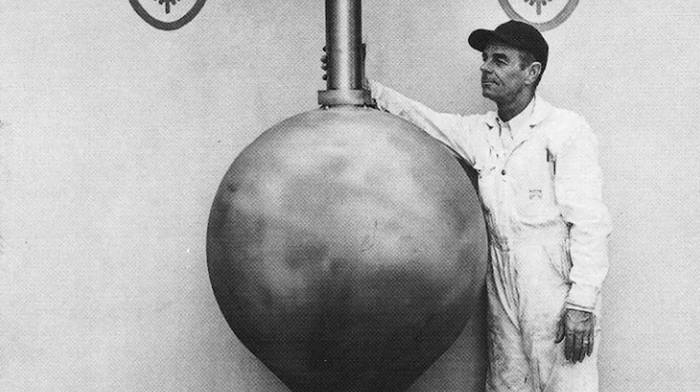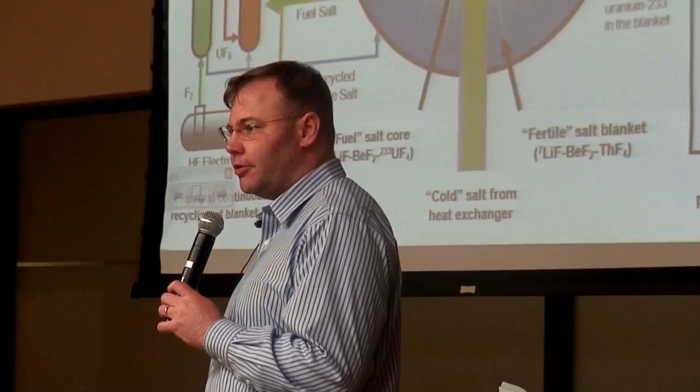You know, the Navy had reactors, and so the Air Force had to have reactors. Very, very radical nuclear reactors, totally different than the kind of stuff we have now, based on the idea that you could take salts and that they would be a really good medium in which to have a nuclear reaction. Well, we were young chemical engineers at the time, and God smiles on young chemical engineers. They do things that in later years would be regarded as crazy.

It wasn't that I'd suddenly become converted to a belief in nuclear airplanes. That the purpose was unattainable, if not foolish, was not so important. A high-temperature reactor could be useful for other purposes, even if it never propelled an airplane.

This is an old facility. Look down before you walk. That's our biggest hazard here right now.

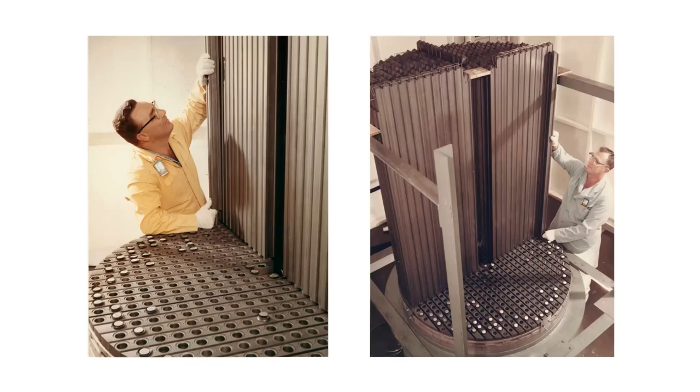Oh my goodness. Yes, yes. I've modeled this shape neutronically. It is like a lead pencil, isn't it? Yeah, it is. Basically, graphite.

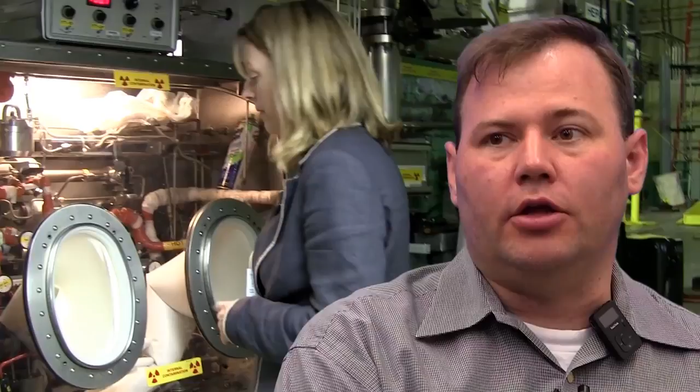We just returned from a trip to Oak Ridge National Laboratories, and one of the exciting things that the Baroness and I got to do was to tour the Molten-Salt Reactor Experiment, which was one of these type of reactors that was built in the 1960s. It was an experiment that demonstrated many of the key technologies, although there are some that still remain to be demonstrated.

How long have you been here? I've been here since 1992. There are very few people in mid-career in nuclear energy right now because there's a huge trough. We have a large number of students coming back into it.

Well, the context has changed completely, hasn't it? It has. Yeah, when we went into nuclear energy, they said, 'What are you, nuts? There's no future in that.' And it really didn't matter. We say it's the true believers.

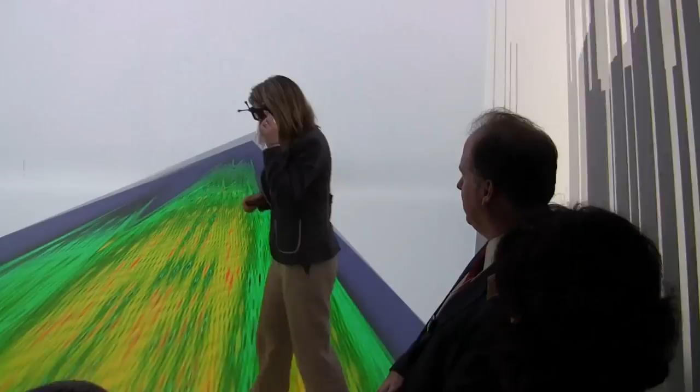So you could have a molten salt reactor that you could walk around on. Oh, this is so cool. You guys have got to try this. Oh, goodness, that makes you feel really weird. There's something in front of me here, it feels like.

I was in 7th grade. I read an Isaac Asimov story about the implications of what free energy would do. And I sort of knew I wanted something, I was going to be an engineer or scientist just from day one. And this sort of said, okay, what can you do to make a difference? And that was where I sort of said advanced nuclear power was something that could make a difference, and that low cost clean energy could make a huge difference to society.

If I'm going to have to get up every day for 50 or 60 years working on something, well, it ought to be something I believe in.

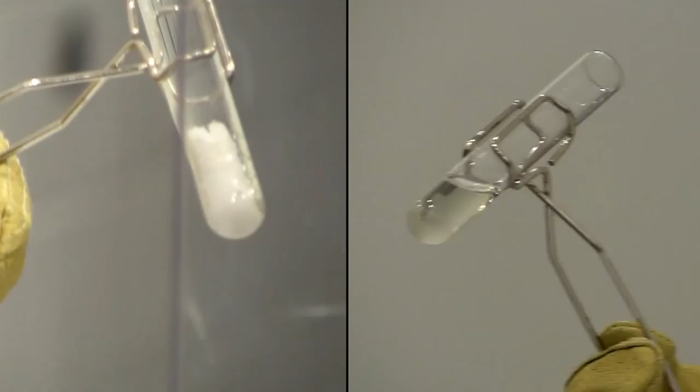Liquid salts are an outstanding heat transfer media, and it really doesn't matter what you're going to be transferring heat for, whether this be a solar power tower, whether this be a salt-cooled reactor or a molten-salt reactor. Viscosity on it is 30 times larger, but water's very low viscosity, so it's still a very low viscosity fluid. Some people might imagine this is quite a gloopy or slow-moving liquid, but it's actually quite fluid. You're right, it does go through a melt much like a glass as opposed to water, which doesn't quite do that. So we want to run it 100 C or so above this, so it flows nicely.

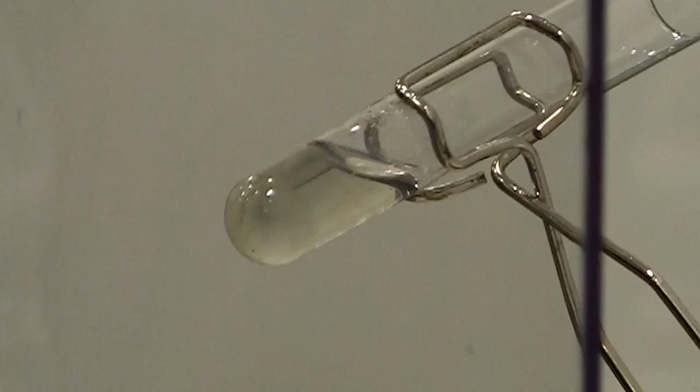If you go ahead and repeat doing things in here, you can see you start to etch the glass just a little bit. So what we have to do in a reactor is keep things very highly reducing. If you put extra beryllium in there, it's essentially giving you a preferred spot to rust. And so this is all about controlling the potential corrosion of the salts within any vessel that you put it in. Yep, the chromium in some of the alloys is more soluble at higher temperatures, and so at your heat exchanger, where it's at hot temperatures...

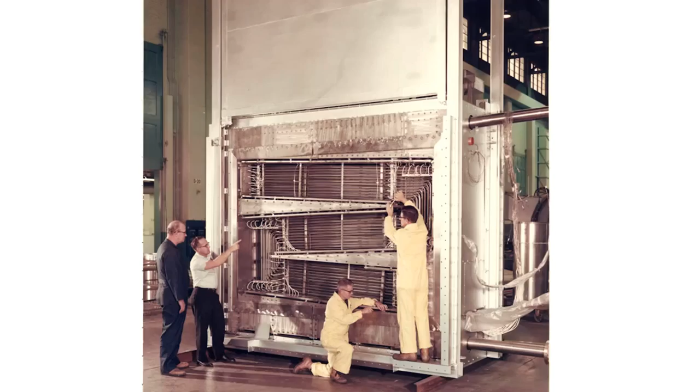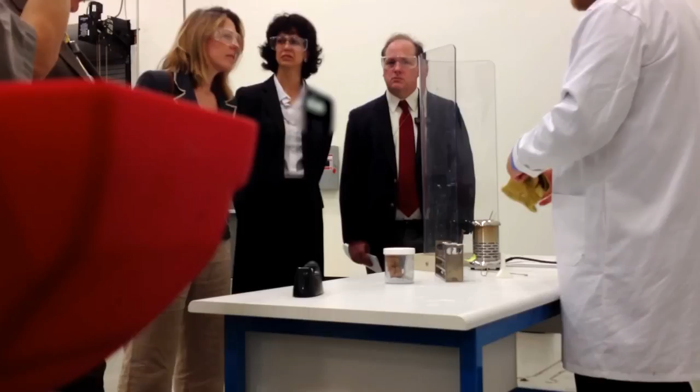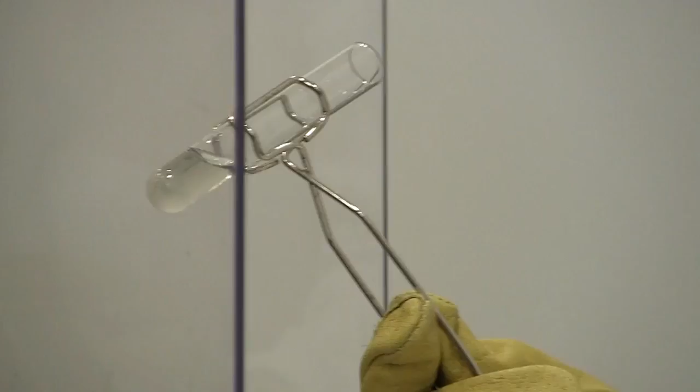The hazards on this are the same as hazards on a deep fat fryer, which is tripping and throwing hot oil, or hot salt in this case, on visitors would be considered a bad thing. But there's nothing else to this, it just makes a nice little clear liquid.

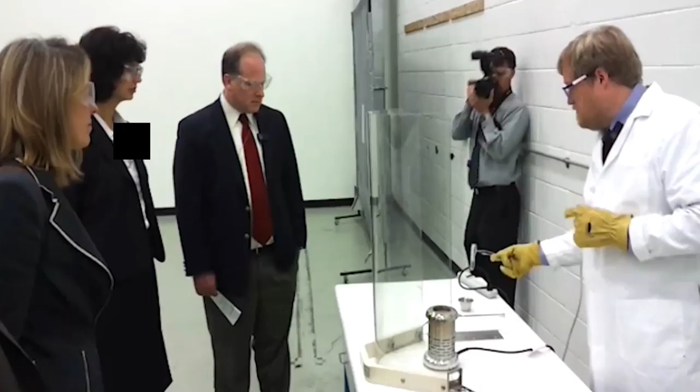I'll just pour this out into a little stainless steel crucible, and you could hear that little snap there - that was just a little bit of moisture at the bottom of the stainless steel. At 450 degrees this thing is a solid, so it doesn't take very long for it to form the solid again. Isn't that a nice feature? If you had a little crack and it was starting to weep, it forms a plug - self-plugging. That's a nice thing, not being under pressure.

On the other hand, if your design keeps the vessel hot, it'll stay liquid, but that's why you have a guard vessel. If, worst case, you have a massive vessel rupture, you still catch it.

The Navy program that led to the light water reactors we have now was well optimized to the needs of the Navy. It actually wasn't very well optimized to the needs of power production. The reason we have that as the base for our power reactor technology today is because the Navy was prepared to pay the first mover costs to make one work. And once you've done that, it's extraordinarily difficult to compete with it, because those first mover costs are very, very high and have no financial return associated with them.

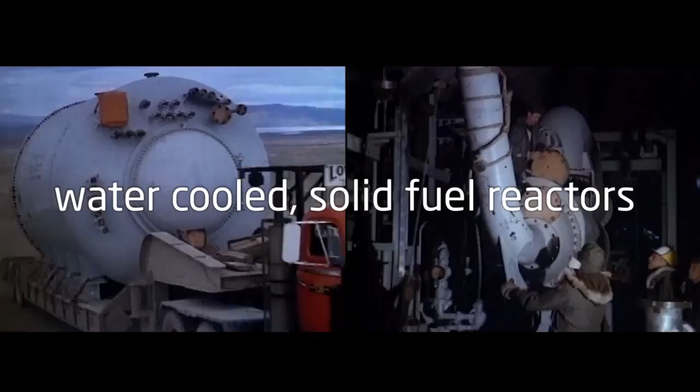The Navy has built their nuclear submarines, and the Army has taken the same technology as the Navy, the water-cooled reactor, and they're doing their thing. But the Air Force wants to build a nuclear-powered bomber.

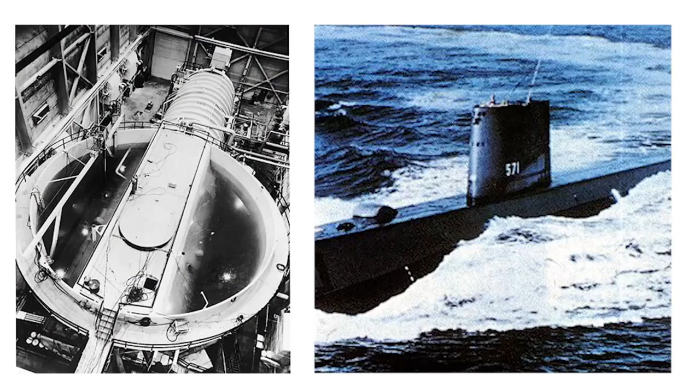Weinberg was a practical man, and he said a nuclear-powered bomber is like probably a really, really, really dumb idea. The dirty little secret was that most of the people involved in it knew from the get-go that it really wasn't practical. In contrast to a submarine, where you've got limited space but can shield it for the people on board, it's much harder on an airplane because of the weight. Most of us did not really think that the aircraft reactor really could work, but we did feel there was a very interesting technology there that someday could be applied. And I would maintain that Weinberg was absolutely right in his assessment of the situation back then.

He knew that to make the nuclear airplane work, they couldn't use water-cooled reactors, they couldn't use high-pressure reactors, they couldn't use complicated solid fuel reactors. They had to have something so slick, so safe, so simple, that operated at low pressure, high temperatures, with all the features you wanted in it. They didn't even know what it was.

I think someday this will be looked at as one of the great pivot points of history - that if this program, this nuclear airplane program, had not been established, the molten salt reactor would have never been invented, because it is simply too radical, too different, too completely out of the ball field of everything else for it to be arrived at through evolutionary development. It had to be forced into existence by requirements that were so difficult to achieve, and the nuclear airplane was that.

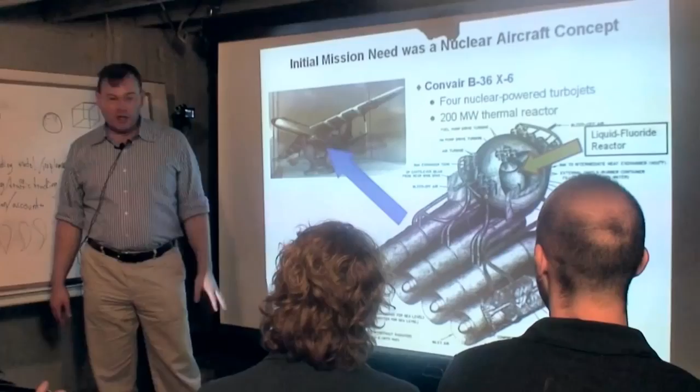So they began working on this high temperature reactor. And remember, this was invented before we had ICBMs or anything like this - this was a doomsday weapon. I mean, if you're flying this thing to Russia, it's the end of the world.

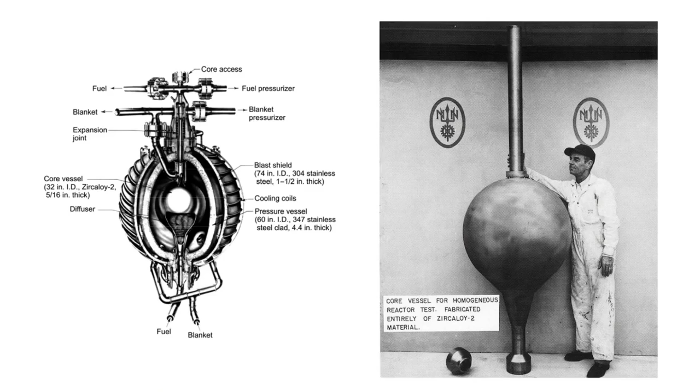I suppose you'd have to say it was a miracle that the homogeneous reactors operated at all, rather than that they operated well. Chemical stability of the system was not really sufficient - it was chemically unstable. The second reactor actually operated very well. That was the Molten-Salt Reactor Experiment.

There it is. This is the place.

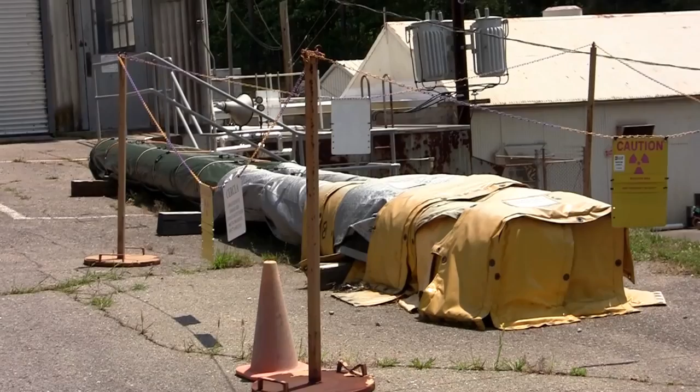These things right over here are the spent probes. Those things would extend to like 60 feet in length. They went down the tank, did the melting, did this bubbling and stirring and everything. A lot of them started above the high bay - when you say high bay, it's taller and we can put cranes in because we can lift things up. You had to go down an additional 25 feet to get to the top of the tanks.

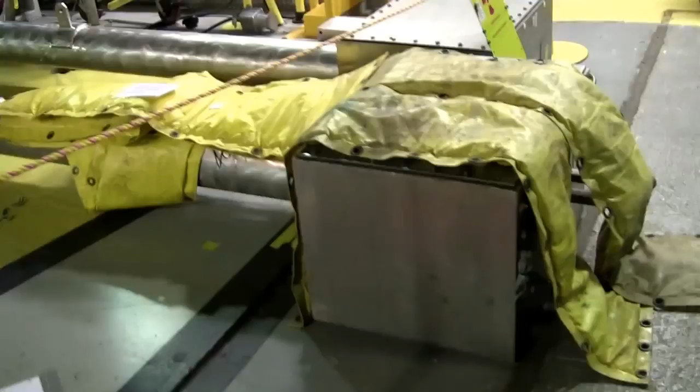Then you had to go inside the tanks, so those things would extend. You got a pipe within a pipe. The box is the top part of the probe. We had the controls, we could tell exactly how far down the probe was moving and the weight of it. And the probe had heaters on the end of it, then it would melt a pool in that salt and sink down in it.

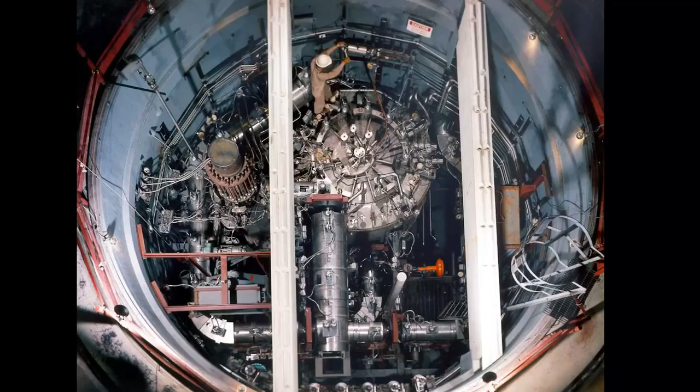So all those long-handled tools they had for operations, it was almost heroic actions, you'd say, when they were trying to do things. And you've got this length of distance, and we'd certainly try to design things today that could be robotically handled. It just would not be designed the same way as it was at that point.

One of the things I've learned from talking to some of the old timers at Oak Ridge - these guys are in their 80s now, if they're even alive - people didn't disbelieve that we could build the machine, they didn't believe that we could maintain it.

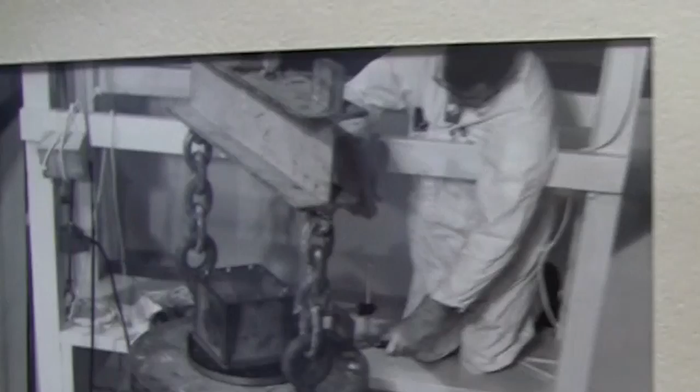Operation of the MSRE was not too difficult, and the people that I had working for me, they all had pound dogs under the porch, old cars out in the yard that didn't run very well. If anything came up with the molten-salt reactor, they'd say, hey, we'll fix that. How you gonna do it? I don't know, but we'll fix it.

And they did. One time, the sample capsule is down in the pump. Flexible steel cable got tangled up. It got bad news - here's the end of that cable cut off. So I said, what are we going to do? And there's the good old boys for you - they said, isn't there such a thing as fiber optics? There's the capsule, and they fished that capsule out. We were back in business.

And they had a lot of long-handled tools, remote cameras. It was challenging, but he felt like, despite the challenge of operating in high radiation fields, that they were able to operate and maintain that machine over the course of its lifetime.

We worked for several years on an experiment that proved that you can handle this molten salt reliably, and when things go wrong, we were able to fix them. The advantages outweigh the difficulties, and the concept is ultimately going to be a practical application.

We still have a few folks who are even operators here who are around. Sid Ball's office is just literally 3 over from me. He was at the controls when it reached its highest power there. He told me that was an accident. It sure was. Yeah, there's another way to tell that story too.

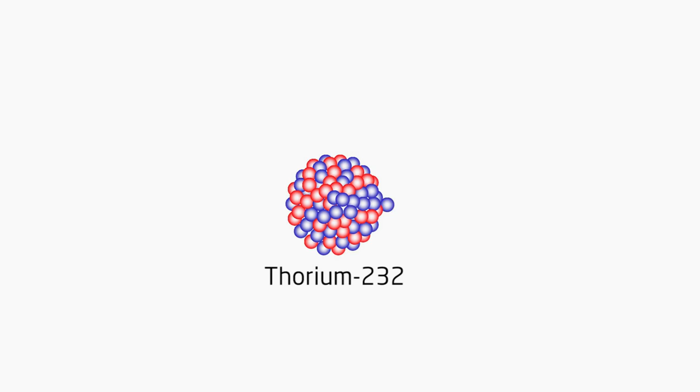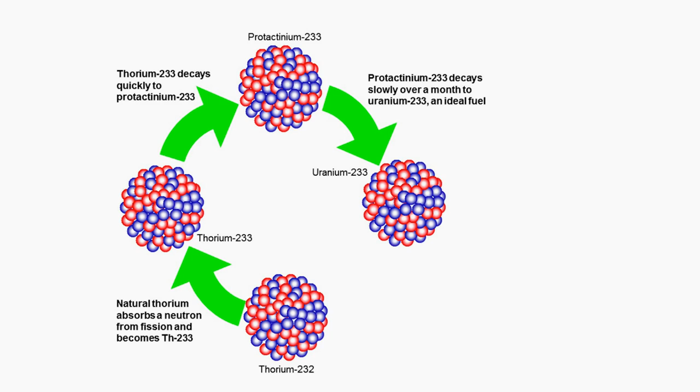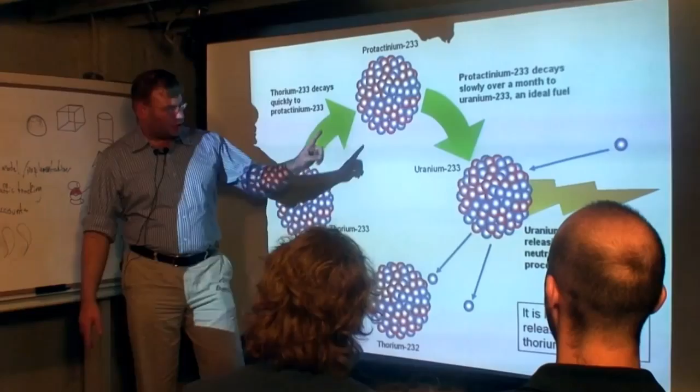The basic idea is thorium all by itself is not going to release nuclear energy. But if you hit thorium with a neutron, it will absorb the neutron and turn from thorium-232 into thorium-233. It's going to decay into protactinium-233, and then it will decay over about a month to uranium-233. Uranium-233, if you hit it with a neutron, it will fission. In addition to releasing all that energy, it will release 2 or 3 additional neutrons. So you need one of those neutrons to go find another thorium, and you need another one to find another uranium-233 to continue the reaction.

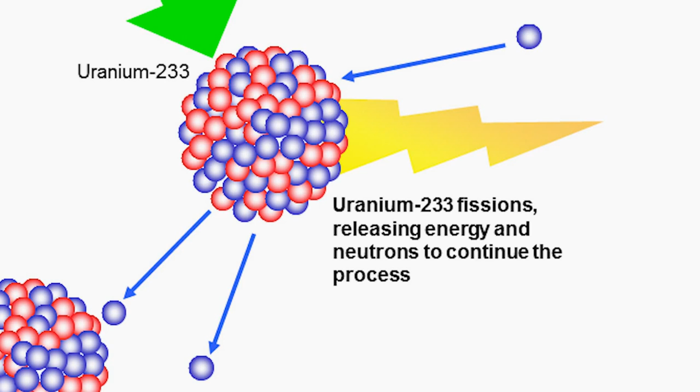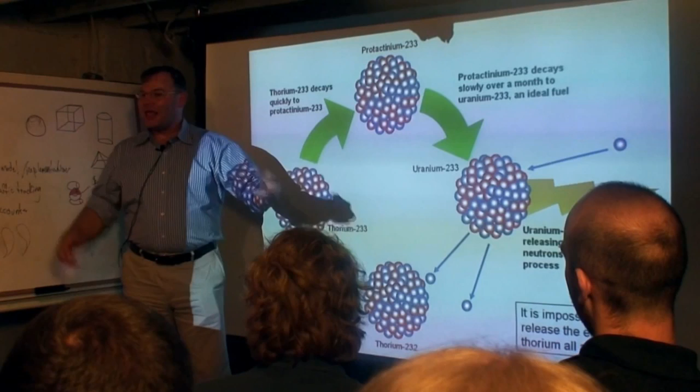You're fissioning uranium-233, but you're making a new one. You can almost think about it as a pseudo-catalyst. If you had some uranium-233, you could catalyze the burning of thorium indefinitely. Through this process, you can essentially implement that very simple thorium cycle, and this is what Weinberg and his team were working on in the 1960s.

The molten-salt reactor experiment was the core. After they completed the molten-salt reactor experiment, they went to the Atomic Energy Commission and said, hey, can we have some more money? We'd like to go now and build the real thing. We'd like to build the blanket, and hook a power conversion system on and make electricity.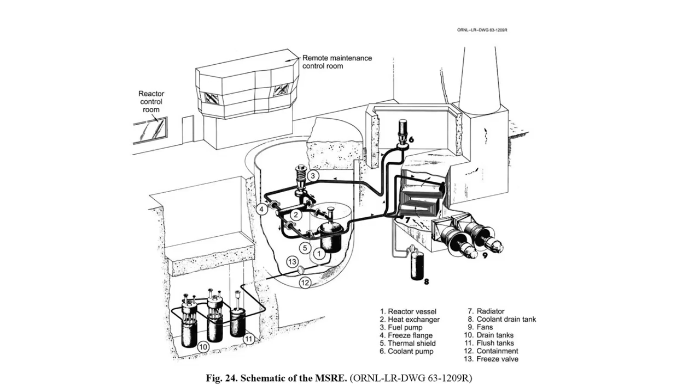They felt like they'd shot the moon. Well, the Atomic Energy Commission, unfortunately, did not share their zeal to continue with the technology. Milton Shaw, who was the head of reactor development in Washington, called up Alvin Weinberg and said, stop that MSRE reactor experiment, fire everybody, tell them to clear out their desk and go home, and send me the money for fast breeders. Milton Shaw was sold on the sodium-cooled fast breeder reactors, and I am not familiar with why that was.

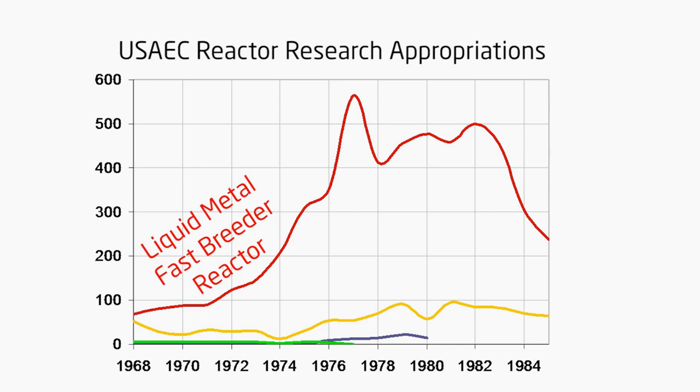The red line shows the expenditures on the liquid metal fast breeder reactor, and this graph only begins in 1968. At that point, the United States had already built several liquid metal fast breeder reactors. It's very hard to see the green line for the molten salt reactor technology - it's extremely low. And then ultimately it was canceled.

We were competing with the fast breeder people at Argonne mainly. They just had more political sway than the molten-salt reactor.

Do you see a prevailing opinion here about molten-salt reactors? We haven't been funded to look at molten-salt reactors. There's no opinions about basic - the opinion is simple: build IFR. That's it, okay, that's the opinion.

The problem with the MSRs is that they've never done it. They had one at Oak Ridge for a little while. Yeah, they went through and did a couple of little tests. We realized that we were minor league money-wise compared to the other programs.

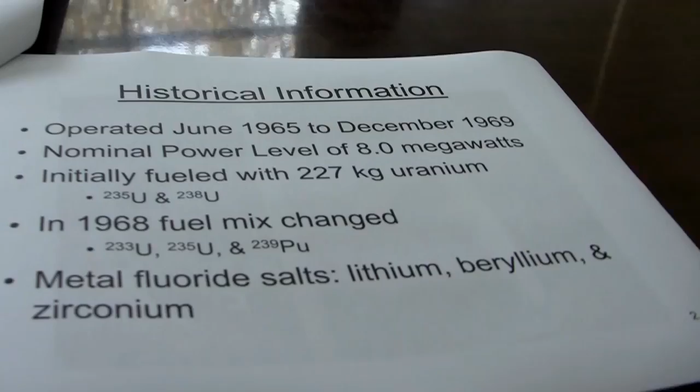U-233 was tested here, and there was a little bit of U-235 in it, and they added some plutonium-239 in that fuel mix. Do you know how much plutonium was added? Oh, about 600-700 grams. They thought the U-233 was the utopia of uranium fuel.

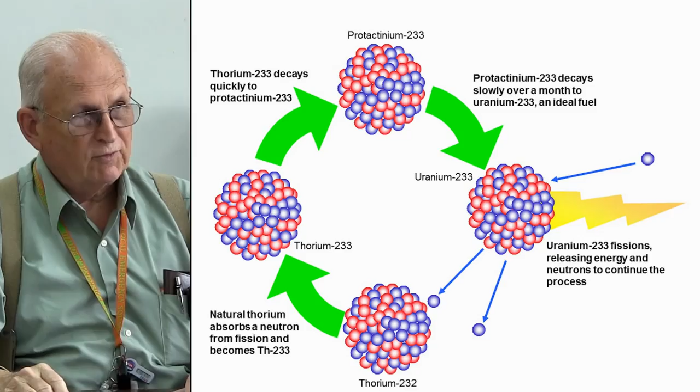Do you feel like the program had a sound technical basis, or do you feel like technical problems were the basis for cancellation? Some of the technical reasoning I heard for the cancellation was that there was a corrosion problem. Tritium was raised as another issue. We made no effort on MSRE to do anything with tritium, and there was a perception that managing tritium was going to be a very difficult, if not insurmountable, issue.

This is the WASH 1222 report from the AEC. Did the people on the program feel like tritium was an insurmountable problem? We recognized that tritium would have to be captured and sequestered for the system to be viable, but most people thought that's something we should be able to do.

Did the people on the program, particularly the chemists or material scientists, feel that corrosion was an insurmountable problem? No, and in some of the subsequent work, after that initial shutdown, they did some experimental work that seemed to bode very favorably for an ability to solve that issue. As well as the tritium issue, because we did do some tritium experiments in that 1974 to 76 period, and those are documented.

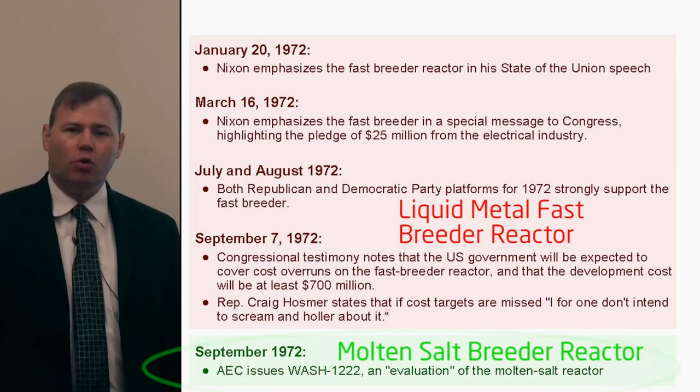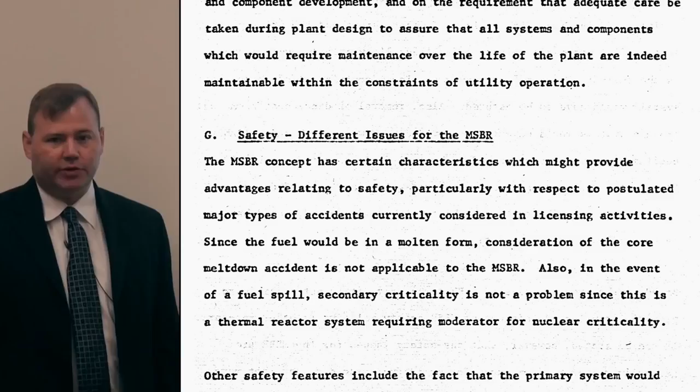In that same month, the Atomic Energy Commission issued WASH 1222, an evaluation of Weinberg's molten-salt reactor. It was highly critical of several technological issues encountered during the development of that idea. More importantly, it almost completely ignored the safety and economic improvements possible through the use of molten salt reactor technology. This was the main focus of Oak Ridge for decades, and it was very abruptly cut off, a very bitter pill to swallow for them. So a lot of these great minds thought their life's work had kind of gone to waste.

The original shutdown came early in 1972 with a letter from Mr. Shaw that says, 'Thou shalt stop right now.' One anecdote I heard: he said, put your hand on your desk, take everything that has to do with molten salt, sweep it off, and you're finished. I saved all my documents. I did too.

So you had this geographically isolated place with a huge body of concentrated molten salt knowledge that never got out. We had a corpus of people in Oak Ridge who knew how to do this in the mid-1970s. They're literally dead and gone now. People that worked on the molten salt reactor would come back and then get shut back down again. A lot of people got burned out from that pattern.

I've met a handful of them. They're in their 80s. They're not going to do this anymore. What's happened to Paul Haubenreich and Beecher Briggs and those guys? Have you kept track of them? Well, Beecher's been dead for a long time. How about Paul? I have not had any contact with him, so I don't know. Quite a few of them are dead now. Well, that's true too, yeah.

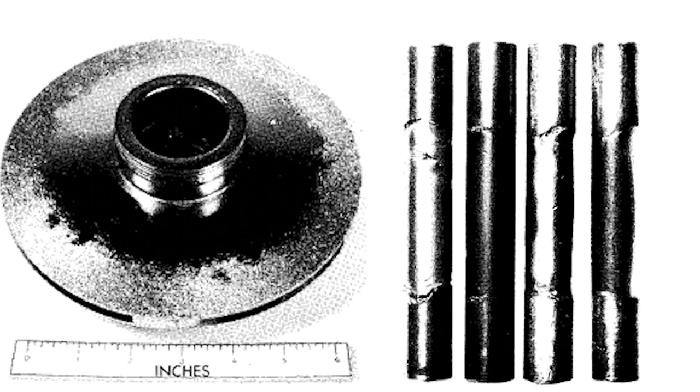And he said it probably set us back a decade on some of our ability to roll out quick changes to our recipes. Oak Ridge made a lot of these salt loops - basically little circular loops of plumbing pipe where they would circulate hot molten salt to see if it corroded the piping. They would run these things for 20 and more thousand hours of operation. They were valuable artifacts of the molten salt age. Well, Oak Ridge was throwing them away, and Uri Gat was like, no, we need these if and when we restart molten salt.

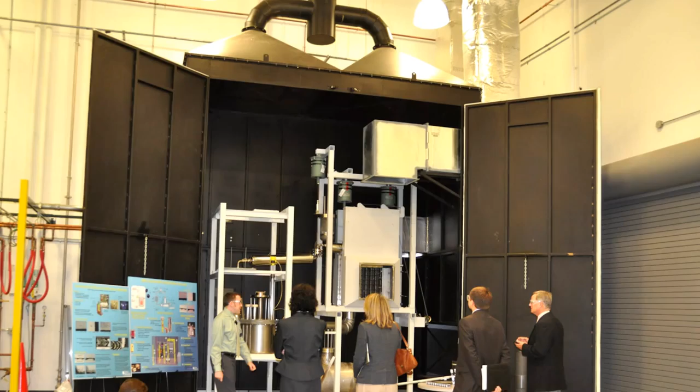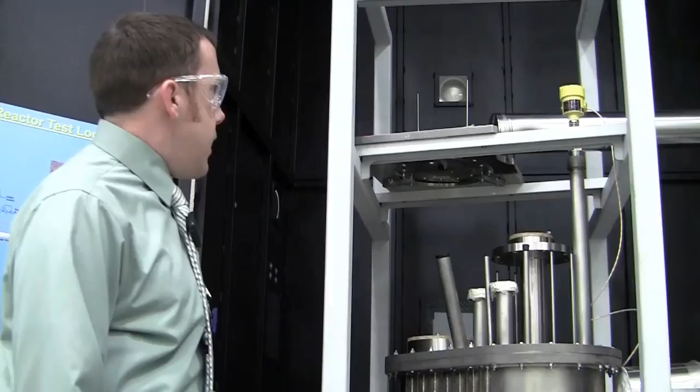We are trying to demonstrate some of the core technologies you need to make liquid salts a standard heat transfer material. The idea of this loop is to retain our expertise in using high temperature salts, to provide a platform for us to test different components and different reactor concepts. Above about 600 C, it becomes technologically very difficult to transfer heat effectively. The loop is designed to run at 700 Celsius, that's about 1300 degrees Fahrenheit. The whole loop is made out of Inconel 600. Ideally for salts, you'd use an alloy like Hastelloy-N.

Right now you can't really get the right components, the right shapes using Hastelloy-N, so we use Inconel 600. It's maybe not the best option, but it's the economical and available option.

This one does flow, so as the salt flows through it, it sends a sound wave through, and that measures the Doppler shift. So these are fluidic diodes.

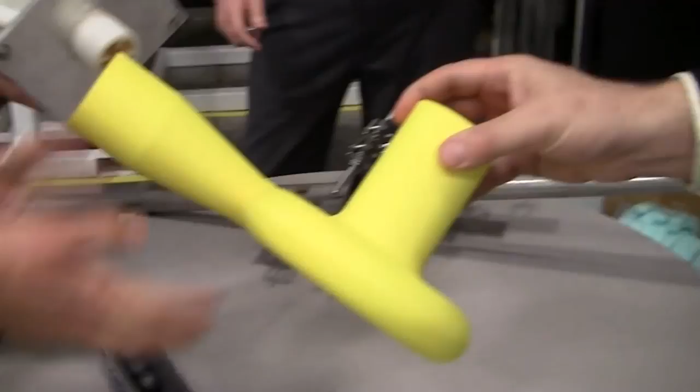It's a way to control liquid flow without using a valve. In normal operation, it comes in this side and out this side, and that creates a lot of resistance—it spins around and comes out. During an accident, the flow reverses and goes this way, and there's not a lot of resistance going from here, just flowing out, because it doesn't spin around.

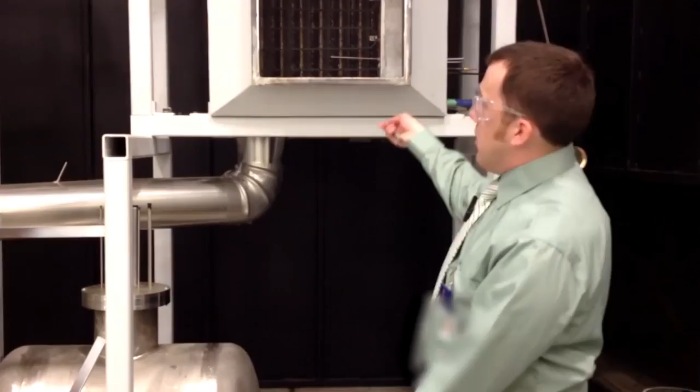Then there's a heat exchanger, that's another part of the test. Is all the heat localized on the pipes, or do you heat the whole box? Yeah, all the heating is in the pipes, either in the pipes or on the outside of the pipes. It's trace heated—you can see coils of heating tape. All the pipes will be insulated with about 4 inches of insulation.

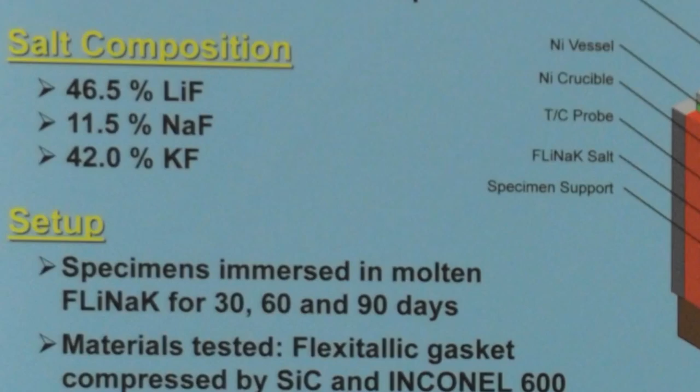There will be a crucible here. That's where we'll initially load the salt, pass hydrogen fluoride and hydrogen through it, and that will clean out the oxides and different contaminants inside the salt. Once the salt's clean, we'll pump it into the storage tank. The salt is allowed to freeze inside of it. That's an issue with salts—you can't have it just freezing inside of pipes, it expands and breaks.

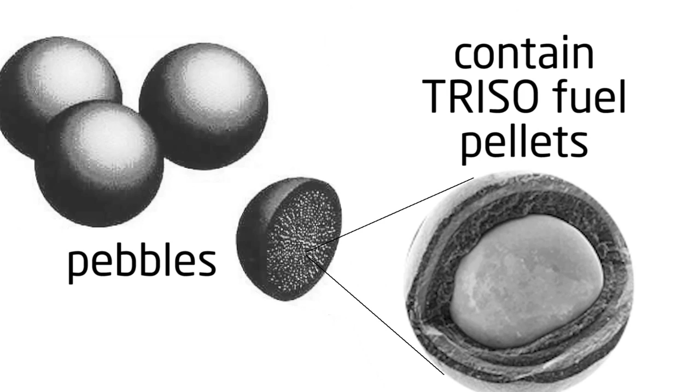The idea is we're testing a reactor concept where the fuel would be inside these pebbles. We'll fill it up about this much, 600 spheres will be inside of it, and that's where the fission and the heat are created, with flowing flibe over it.

Can I ask what the theory was around using a solid fuel pebble in the flibe rather than dissolving the actinide into the salts? Currently in this country, we're not really looking at the molten salt fueled systems.

Using a molten salt as a so-called working fluid, it does the job of transferring heat from one place to another. Molten salts have what's called a heat capacity—the ability to hold onto heat. They're great at it. In the example of your car, you want to move heat away from your engine as efficiently as possible and then just disperse that heat.

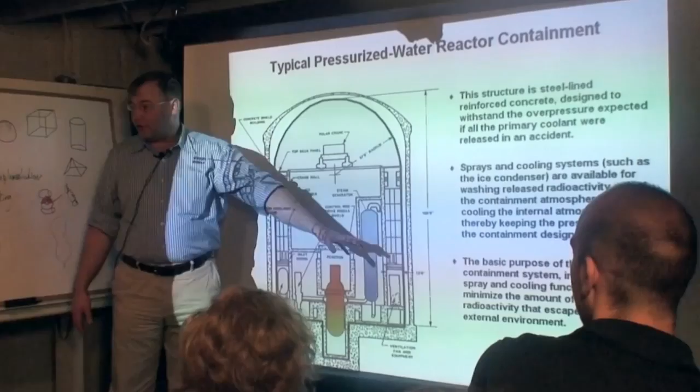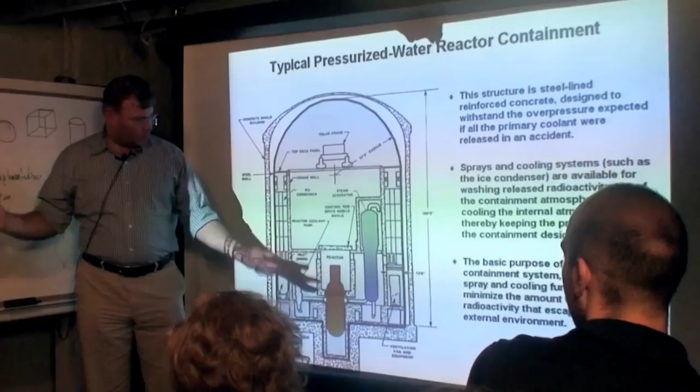The boiling point of water is only 100 Celsius, 212 Fahrenheit. Don't ever open your radiator—because it's under enormous pressure. This building is the size it is, and the way it is, precisely to accommodate this event. They've designed this reactor so if this happens, all the steam is captured in this building and doesn't get out. It's much, much bigger than the reactor, and that's all driven by that 1,000 to 1 difference in density between steam and liquid water.

The boiling point of a molten salt, however, could be 1,000 Fahrenheit, could be 1,500 Fahrenheit, depending on the type of molten salt. They do it at 1 atmosphere of pressure.

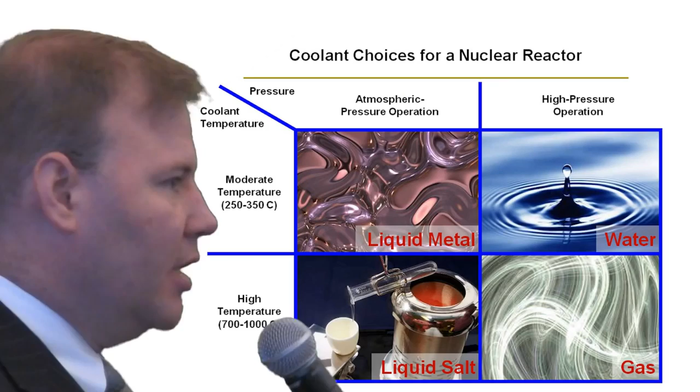Visiting the potential coolants, water is the one most commonly used. It operates at relatively low temperatures and very high pressures—that's exactly what we don't want. We want to operate at low pressures and high temperatures in order to achieve high thermal efficiency. Gas can operate at high temperatures, but it has to go to high pressure. Only the salts appear to offer the potential to go to high temperatures at low pressures, and that's a unique combination.

Using a molten salt as a working fluid to move heat around is excellent, because in that case you want as much of that heat as possible. Now, fluoride salts can also contain nuclear fuels like thorium and uranium, and that eliminates a major cost of what we do today in nuclear, which is to fabricate nuclear fuels.

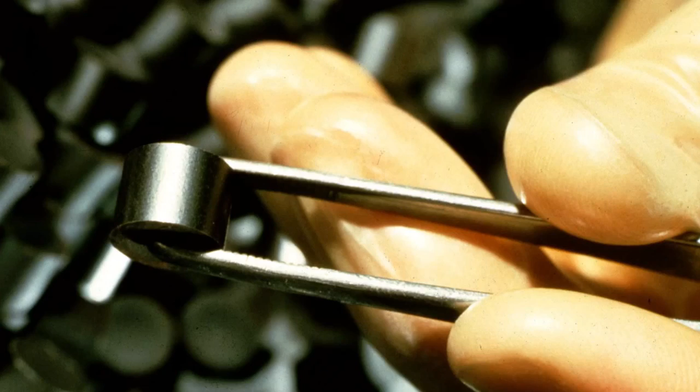Let me talk about today's nuclear fuel. They take these fuel pellets and slide them down zirconium tubes, segregating the pellets along the length of the fuel assembly according to enrichment. They'll put the most enriched ones in the middle, then decrease the enrichment along the length of the fuel assemblies. It's a ceramic.

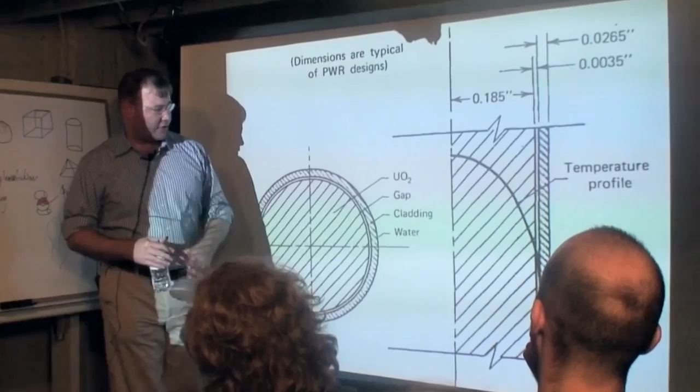It's a lot like the stuff your coffee cups or cooking ware is made out of. Great at going to high temperature, but not thermally conductive, so it gets very hot along the center line of the fuel. This stuff has about the cross-section of a pencil, but between the center and edge there can be like 1,000 degrees of temperature difference. That puts enormous thermal stress on the material itself.

You can't even come close to 100% burn, not even approaching it. If it gets too damaged, it's going to breach the cladding and let some of its fission products out. So you get very, very poor fuel utilization.

If you remember when you went camping and built a fire, it burns the hottest in the middle, and the stuff on the edge isn't getting burned very well. They'll load in about a third new fresh fuel, and then reshuffle the fuel that's already in there, moving it from the periphery into the center.

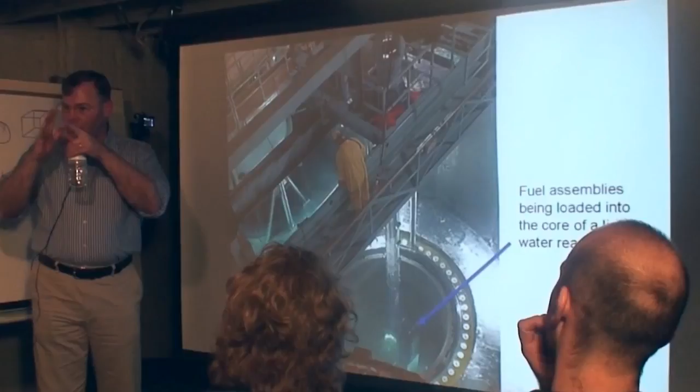All their money now is coming off fuel supply contracts. That's how GE and Westinghouse make money on nuclear power today. They don't build reactors, they sell fuel. Then someone comes along and says, hey, guess what? I got a reactor. It's got no fuel fabrication to it.

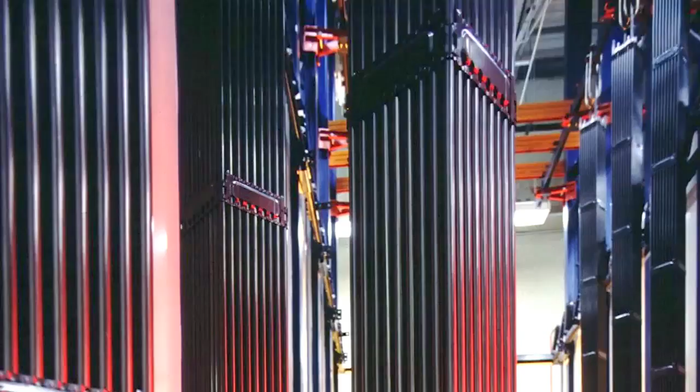Making a fluoride salt, by and large, is trivial. Making a carefully enriched solid oxide is not. So you could get an aqueous fuel. In this system, you wouldn't put fuel in it. There must be some advantages to doing the solid fuel.

If you want to use the salt as a coolant, it's much, much easier to do something that's non-radioactive on this. That's why we have the walk before you fly approach—the U.S. is electing to go after a salt-cooled reactor at first.

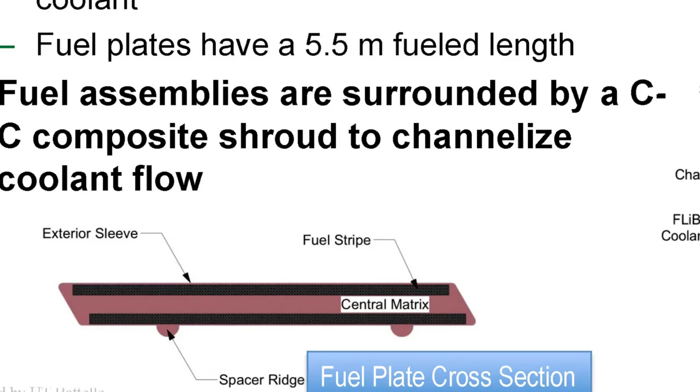Our method of rejecting heat is into the coolant. What we have are planks, about 25 millimeters thick. You can put whatever kind of test you can imagine in this area—we could put a solid plated fuel in. That test section can be replaced and others can be put in.

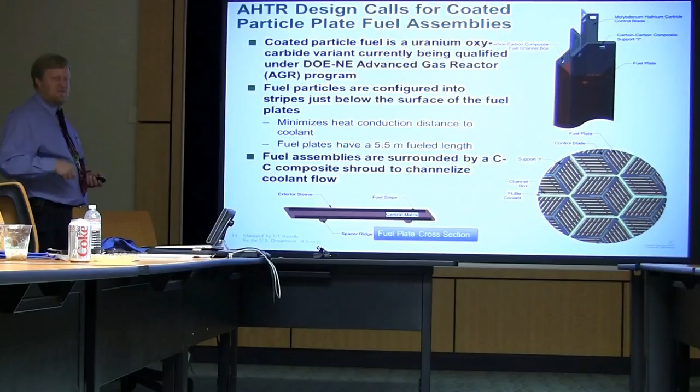Looking down from the top, there are 18 fuel assemblies arranged in a hexagonal grid. In a solid system, you can't get into the bulk of the solid fuel. In a liquid system, you effectively have infinite surface area.

It is not to say that the U.S. doesn't recognize that molten salt reactors have some very interesting, advantageous capabilities, but they are a more technically challenging thing to do. What is easier—running a liquid past a solid to transfer heat, or having the fuel itself be a liquid?

So I would argue that actually combining the two is easier. Sure, it's more chemistry, but so what? I'm a chemist. There are lots and lots of chemists on the planet, and a lot of them are a hell of a lot smarter than I am. So, go solve the problem.

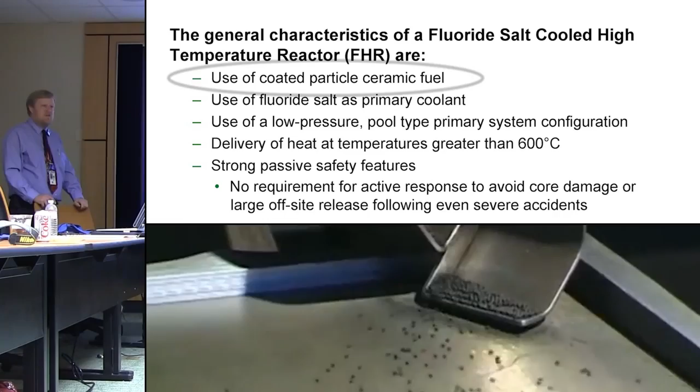It uses a fluoride salt as a primary coolant and coated particle ceramic fuel—that's the TRISO fuel. This is the TRISO. Essentially, these are small kernels, smaller than a millimeter.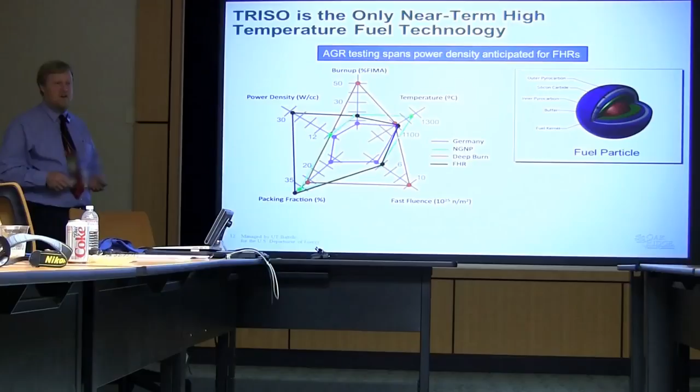We've got the fuel in the middle, and you've got a multi-layer structure—the important thing is the silicon carbide in here, which is actually a gas-tight containment. Even though we're using silicon carbide as part of the design, that's part of the test. We're going to find out how that performs in a salt environment now.

We'll be doing natural circulation, safety testing, corrosion specimens in here, and a pumped loop. Figure the next decade we will continue to use this as a base for our system.

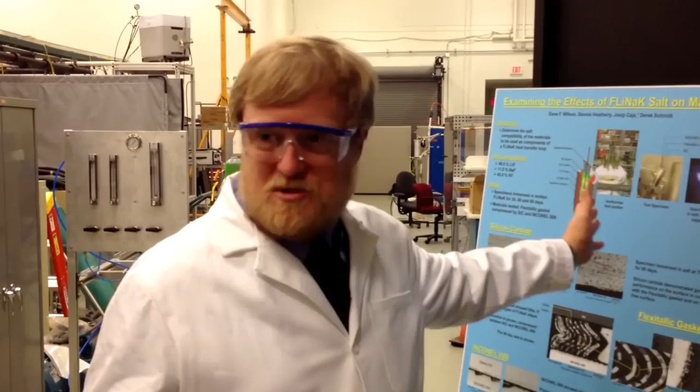And you just happen to hit the timing such that the induction power supply is out being serviced, the pump is out being serviced here. We're expecting by the end of September to have the loop pretty well ready to heat up.

They're not doing neutronic stand-ins the way China is. So what's the freaking holdup? They got the last guy in the world who knows how to make these different kinds of salts.

We're not asking for our national lab to do miracles. We're asking them to basically replicate something they did in 1952, probably. Things went very fast in the 40s and 50s, not only because of the regulatory environment, but also because they were not developing commercial nuclear power.

They're developing it—just get a reactor up, show that it works, do experiments. Nuclear technology is well beyond that now. It's commercial production technology, so you have to do things differently than we did back then. If you wanted to just do an experiment, yes, we could compress the scale and have something running at very short periods of time, but that's not what we're looking for now. We're looking to be a preferred source of energy for the nation, and that takes more time.

Back when they were developing the molten salt reactor, they had numerous loops that were not fueled—these range from natural circulation test loops, to material testing, to pump systems like this. Most of the technologies for a molten salt reactor, as far as thermohydraulics, are identical, so they're all very relevant.

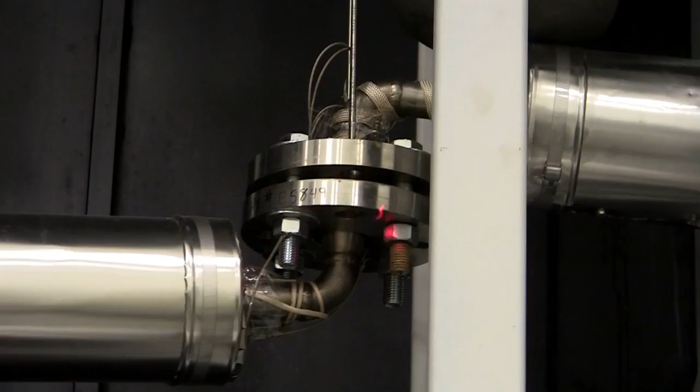There are a number of technologies that have never been done before in salt—that rotating flange up there with gasketed seals, the fact that we've got ceramic and metal pieces in a single loop. Tons of stuff you're doing with FHR is in common with what we're doing.

I can certainly see reasons for looking at thorium reactors as a follow-on, and the true molten salt reactor. You have your conventional solid fuel with a liquid coolant—a fixed fuel form with liquid flowing by it. Your pebble bed is a bit of a transition, in that the pebbles can percolate up through, so you get some movement of the fuel. Then your next step is a slurry, where you've got smaller particulate moving with the flow. And the final step is actually just the fuel in solution. You could almost imagine a continuum, with the pebbles just getting smaller until finally they're in solution. So each of these are steps towards a full solution.

Different reactor concepts—we're actually debating this internally within the nuclear lab system. Do we want to build a prototype reactor that demonstrates some game-changing technology for nuclear? Yes, you do. But it's going to be a major national commitment when you're talking those types of numbers, and there's nowhere near that level of consensus that this is the right path forward. Without building that consensus, we're going to stay an interesting technology option forever. We will never go beyond that.

We're funded through literally thousands of projects that come down from DOE and other government agencies where they say, we need you to go do this, we need you to go do that. There's no line in the federal budget that says Oak Ridge National Lab, $1.65 billion, go do good things. So we need something now to add to our grid with clean nuclear power, to get us to these advanced designs. And that relies heavily on the established light water reactor technology.

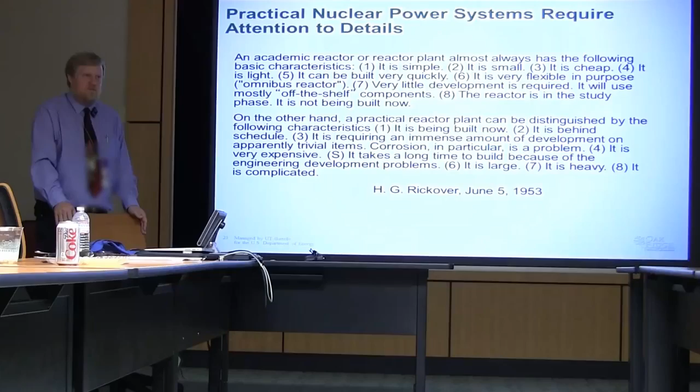The NRC license requirement takes a set number of years to get done. You can't put more money on that and get it done any faster. So you do reach a point where you just can't push it any harder. Now, there are other parts that are resource limited and could go more aggressively, and we do the best we can with the resources available. But there are people up there who control the resources—they're not going to make it happen, but they can at least ease the path.

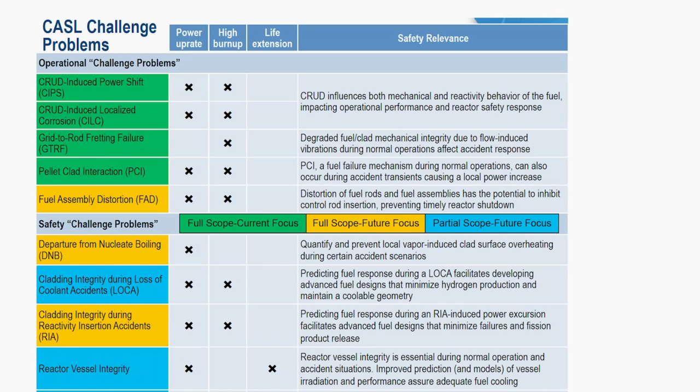It is shifting people's thinking to think a little more long term. Right now, there's a lot of focus on assuring the LWR industry gets, as we talk about, life extension. The Consortium for the Advanced Simulation of Light Water Reactors, CASL, is an effort to develop high-fidelity integrated models of operating reactors. We're focusing on pressurized water reactors, new fuels that are more tolerant and resistant to accident scenarios like loss of coolant and cladding integrity.

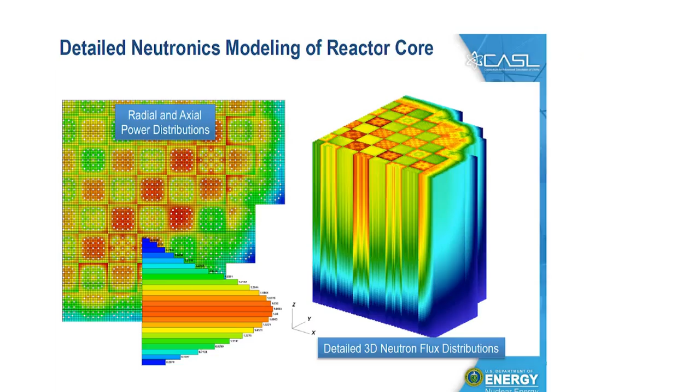Right, so you're modeling a physical system. So how do you know this is right? These white areas are control rod guide tubes. In the center of one of these is called an instrument tube, and they can run a fission detector down that instrument tube and get an axial power distribution. So we can compare that.

Could you talk a little bit about the versatility of this with regards to other reactor types, particularly like MSRs? You've got to worry about a different type of coolant and different geometries, but you still have neutrons, you still have heat transfer, you still have structural mechanics and all that base technology. In fact, DOE said you must select and model physical reactors, show that it's relevant to actual operating reactors, not a design that isn't operating yet. But in general, the simulation technology we're putting together we expect it to be broadly applicable to a large class of reactors.

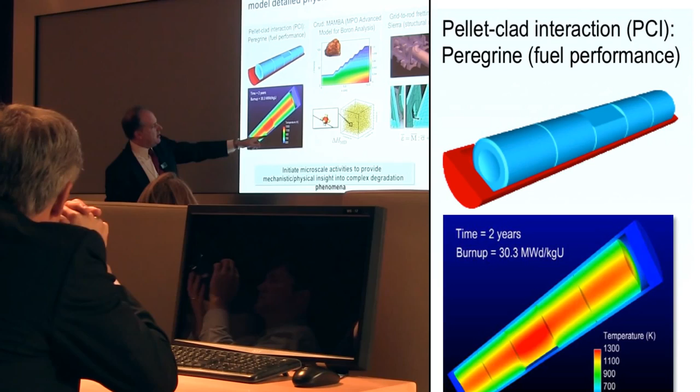This calculation here is looking at a fuel pellet that might have a chip in it, and what would happen is that you operate with a chip in a fuel pellet, what would happen to the cladding and the stress on the cladding. This actually shows what holds the fuel rod steady. If you get a gap in here, the rod can vibrate and wear a hole.

For the nuclear industry, for the most part, I think it's fair to say they're really not interested in novel concepts. They have problems today that they want some help with.

Some of the people that we were visiting with in Oak Ridge over the last few days were retirees who had actually worked on the molten salt reactor program. An issue that was repeatedly brought up was it's a very, very different kind of machine than what the nuclear industry is used to. Suddenly here were these young people who were kind of showing an interest in their technology that they obviously had a real fondness for. There's now a whole bunch of people out on the internet that are following this, taking such an interest in their sort of pet project that they clearly loved. One of them said, 'Oh, everything I worked on got cancelled.' It's like, which they felt, that perhaps that their secret had been overlooked. But I think we're hopefully resurrecting it just in time.

A filmmaker in Canada put out a request on Kickstarter, which is a way to raise funds over the internet, saying, 'I'd like to make a video. I've done everything up to this point for about $1,000. I'd like to get $20,000.' When we told those molten salt reactor retirees that 600 people had donated $40,000 on the internet to make a video about their work, I can't even tell you how excited they were. Yeah, it was awesome. One of them looked at each other and they said, 'This sounds crazy, doesn't it?' And he was like, 'Yes, I'm not sure these guys are telling me the truth.'